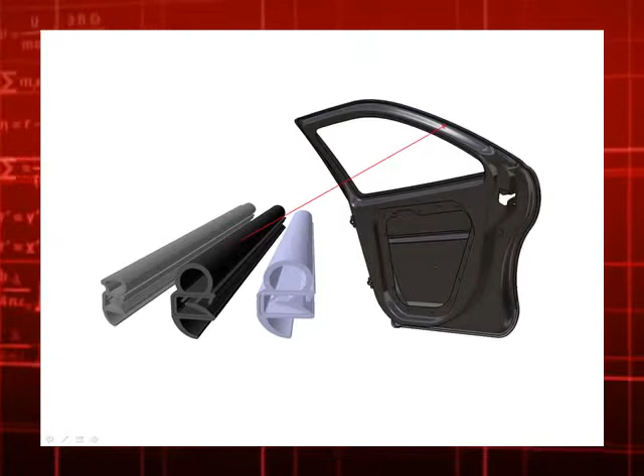Today, we're going to talk about an effective virtual prototyping solution that will help automotive door seal manufacturers design robust, reliable, and dependable door seals. One of the several problems that door seal manufacturers face today is the constant worry that their door seals, although designed for a specific door frame, might not be able to accommodate for the minor potential deviations that could exist in the door design.

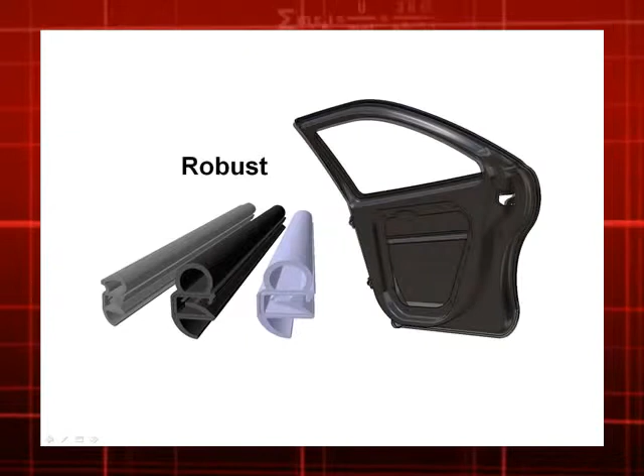This leads to wind noise and water leakage during testing, which in turn renders the door seal ineffective. Therefore, there is the constant desire to design a robust door seal that can handle many situations. There are many variables that affect the performance of a car door seal.

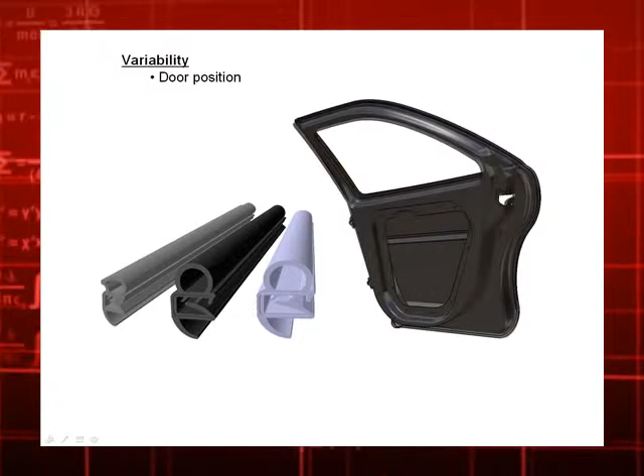Some of these variables are things like potential variability in the door position, minor deviations in the door sheet metal, changes in hinge configurations which further affects door positioning and behavior, effectiveness of the door seal itself, which translates to issues of design such as seal wall thickness, materials, and friction coefficients among the different areas of the door seal itself.

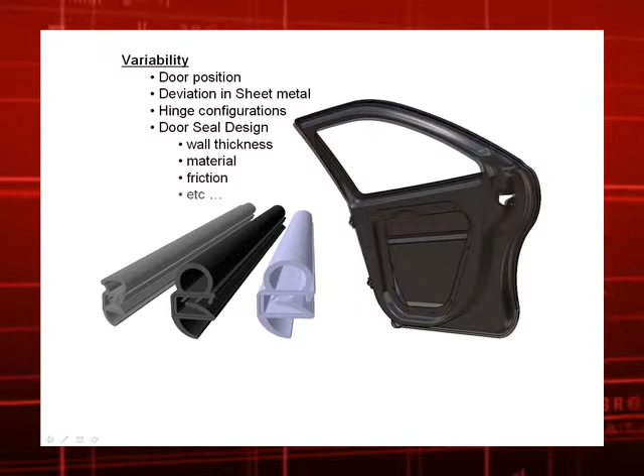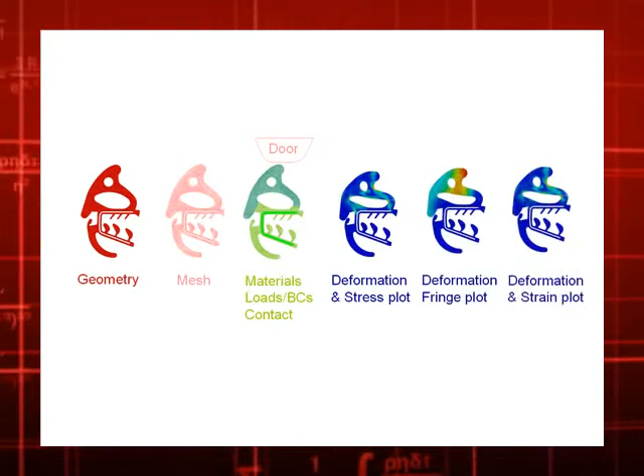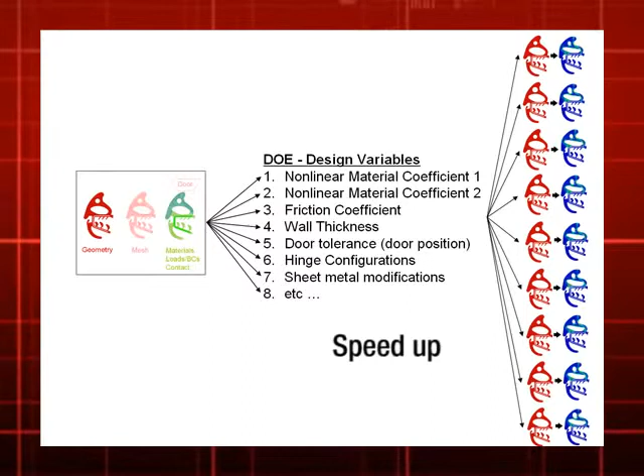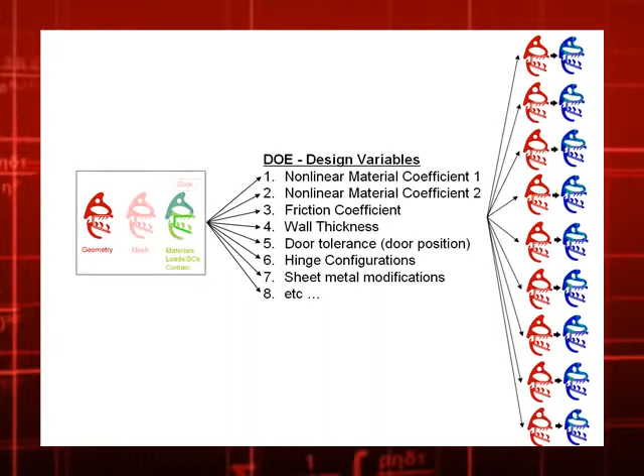Therefore, it becomes clear that one must perform virtual test analyses on the door seal designs and run a design of experiments on these variables to ensure a robust door seal design. Another challenge is to try and speed up these analyses processes while using best practices for setup and performance. This will help the manufacturers churn out design iterations quicker with higher confidence of quality. So how can this be done today?

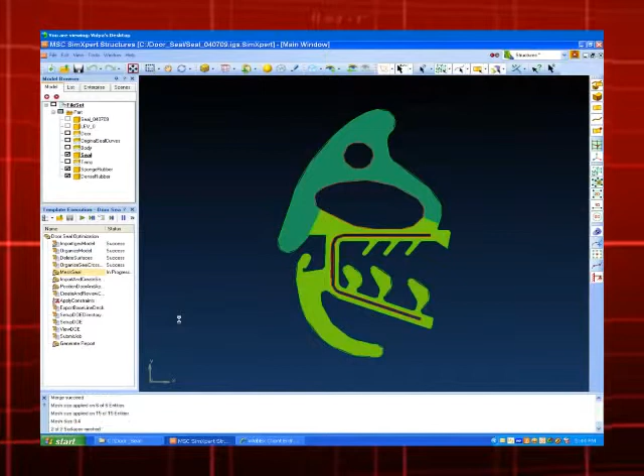With MSC Software, any door seal engineer can execute a template, which would have been authored by an expert analyst, which will then guide this engineer to set up the door seal nonlinear analysis model quickly and properly using SimXpert. The template guides the analyst every step of the way, recommending the best practices of setup, from importing the geometry, to meshing, to defining materials and properties, loads and boundary conditions, and so on.

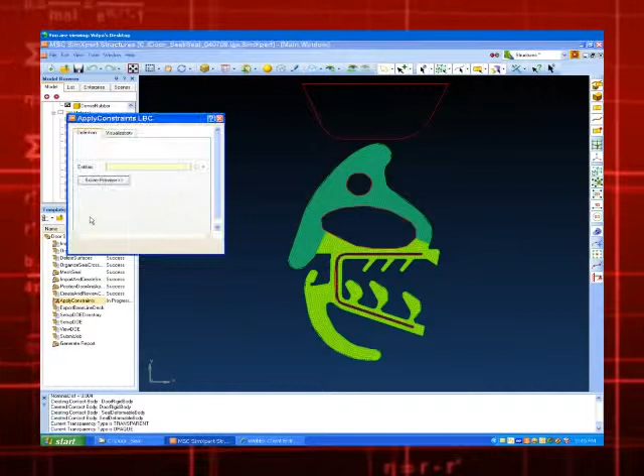Moreover, it is designed in a way to be a generic template, so it can be used over and over again on different door seal designs. Once the model is set up, MD Nastran's SOL 600 or SOL 400 solutions are used to solve for this nonlinear problem to generate the nonlinear results.

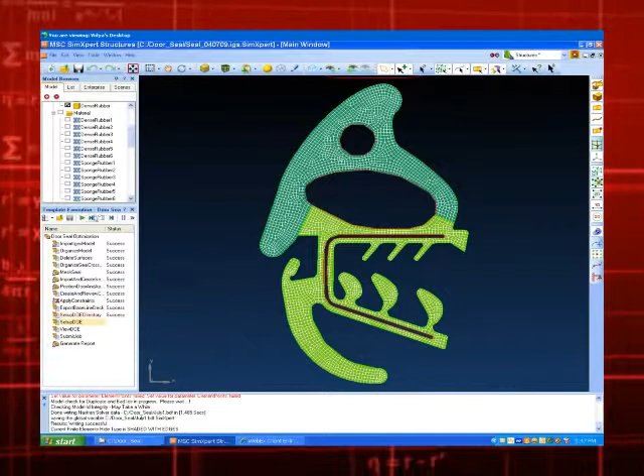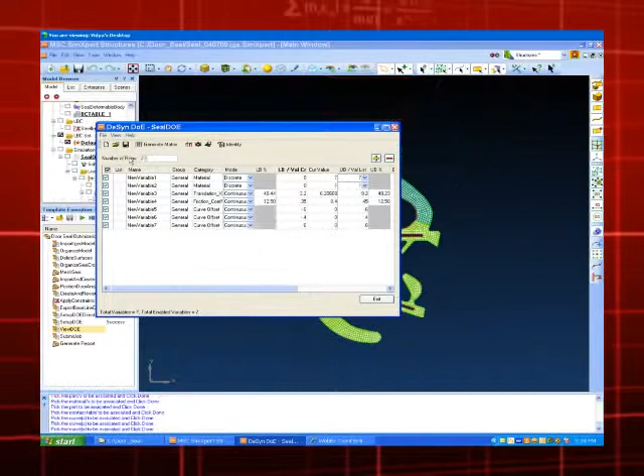More importantly, this template also prompts the user to select the variables that will be used in the design of experiments. Once the door seal engineer selects his variables such as material coefficients, door position, wall thickness, and others, he continues on to do his DOE study. One can now have the template invoke another application altogether to generate the DOE matrix if desired. In this example, Adams Insight has been used to do that.

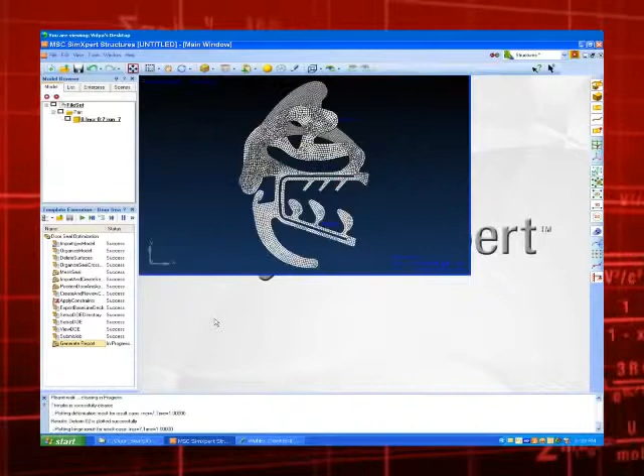Once the runs are solved with MD Nastran and the results are viewed in SimXpert, the template is used to automate the generation of a comprehensive report. It will automatically post-process all the results and then snapshot images of the stress contours and deformation plots of the door seal DOE runs and format them with the necessary documentation to render an informative report of the entire DOE study. This now can be shared with other engineers and managers easily so that the appropriate deductions and hence decisions can be made.

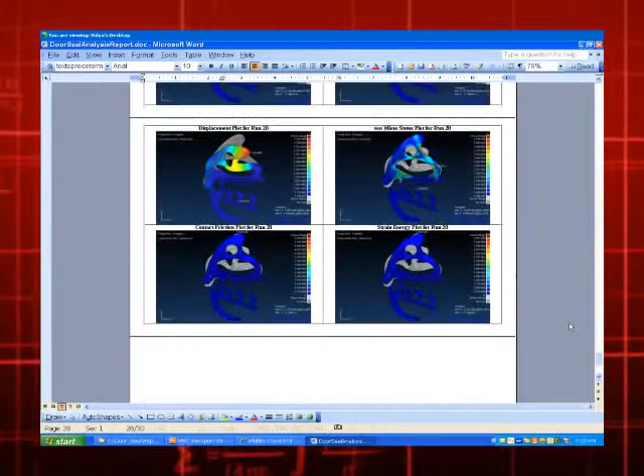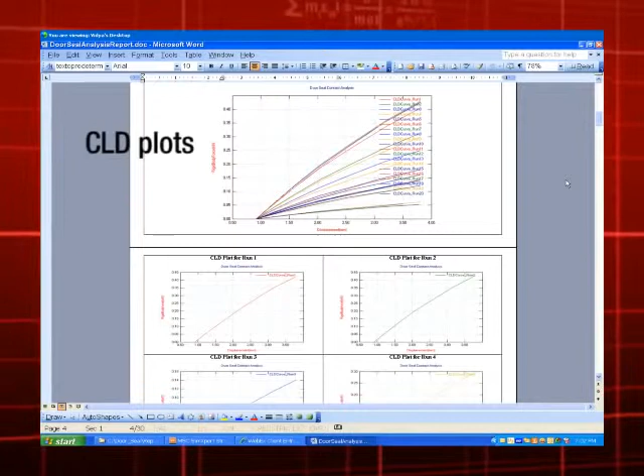For example, they could look at the compression load deflection (CLD) plots, which convey the response of the deformed shape of the seal upon door closing. This analysis is usually performed on different cross-sections around the front and rear doors, header, B-pillar, A-pillar, C-pillar, etc. The door tolerance was used to position the door in the DOE study. The graphs show the CLD curves for min-max wall thickness at nominal, inboard, and outboard positions.

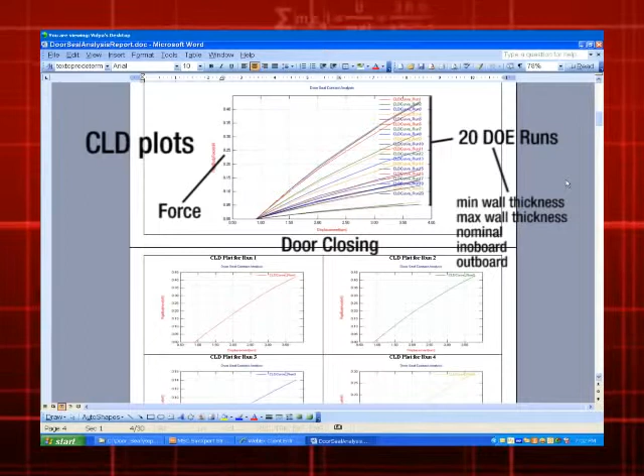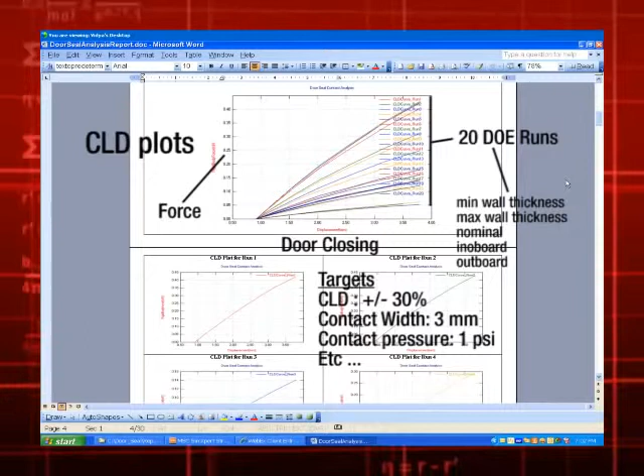An FEA analyst can now look at the report results and conclude whether the design section is robust for certain sheet metal tolerance or not. Usually the CLD target should be met within plus minus 30% at different door positions: inboard, outboard, fore, aft. The contact width and pressure are also important to verify. The best practice is to have at least 3 millimeters contact and 1 psi pressure on the door seal. They can then continue to look at the other plots to make other deductions.

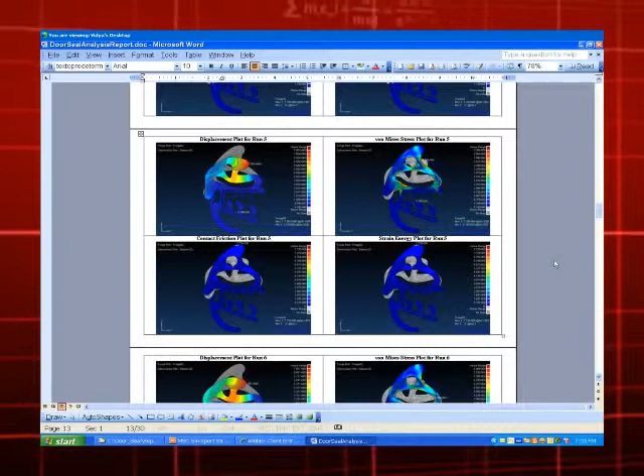Now engineers can either conclude whether this design is good, or they can decide to add more variables to the study, like parameters of the CAD design perhaps, and continue to easily and quickly iterate many times to come up with a quality, robust door seal.

Because of the ability to capture best practices with SimXpert templates, leveraging MD Nastran's powerful solver for the nonlinear analyses, great handy tools like Adams Insight, as well as the ability to automate report generation, MSC clearly offers a powerful solution that can help engineers produce reliable analysis results at incomparable speeds to help manufacturers design and produce top-grade competitive products into the marketplace. Thanks for watching.